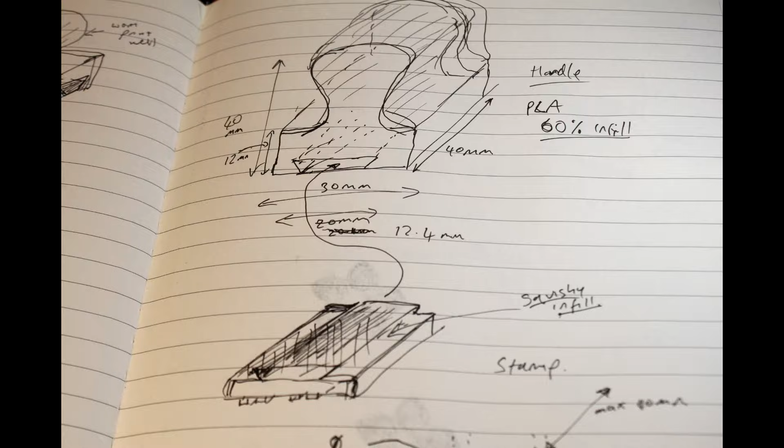So the first thing I wanted to do this time around was design a system to hold the stamps so that you could have multiple stamps on one handle and switch between them. So I needed to print a decent heavy high infill handle. I did this in Fusion 360. It's actually surprisingly hard to get the right clearance because you are mixing TPU and PLA and they both expand differently when you print them, but I did get there in the end after multiple attempts and quite some tweaking of the spacing between the two parts.

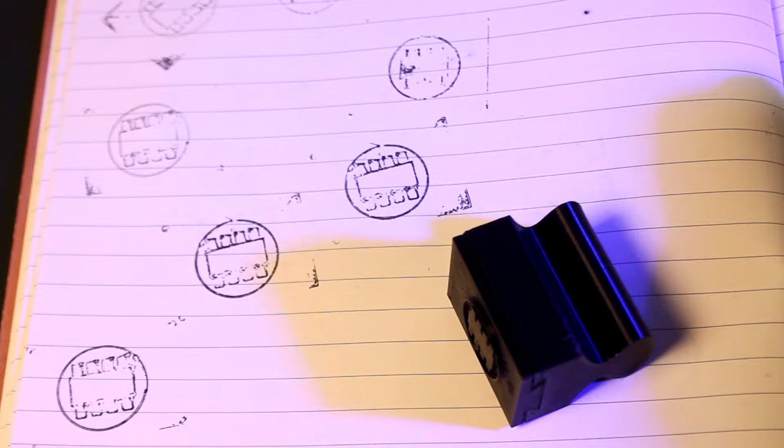Take 1 wasn't terribly successful. I tried simplifying the logo and printing in PLA. This honestly wasn't a massively serious attempt as I knew that TPU was probably going to be the better material anyway, but I didn't want to keep having to change filaments, so I decided to start with PLA while doing the handle, and then I could get both the sizing and tolerances mostly sorted out at the same time as I could rule out PLA as a stamp material, which I think I pretty much did. PLA is pretty poor at this. I assume it's just due to the lack of flexibility.

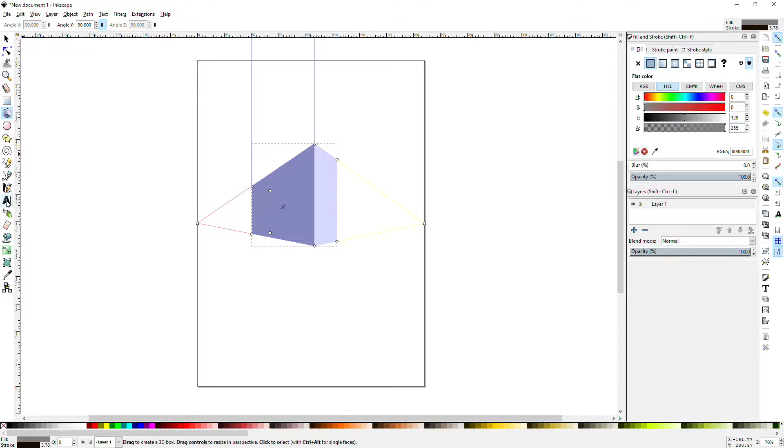This is of course pointing towards TPU, but not just that, the design of the stamp's base also factors in. More on that in a minute. But while we're digressing, if you want to make a stamp logo, I might as well tell you how I did it. I started out in Inkscape and I drew a design. What's important to remember in Inkscape is that any design work you do based on stroke thickness will not transfer to Fusion 360. Fusion 360 sees any stroke as just a line with no depth, so don't waste your time messing around with stroke width, colour, style, etc.

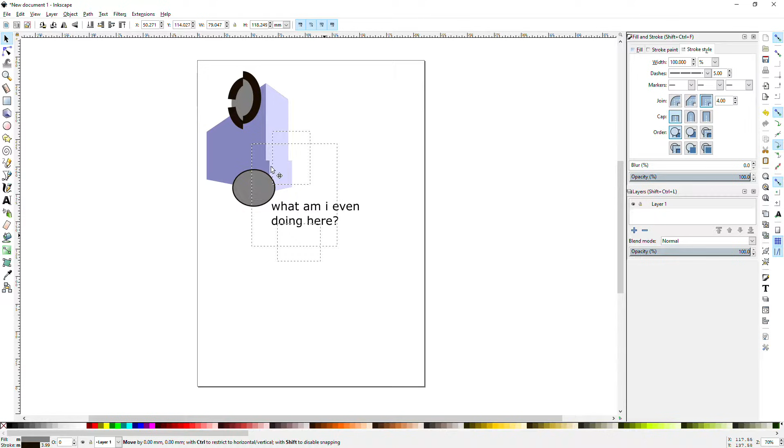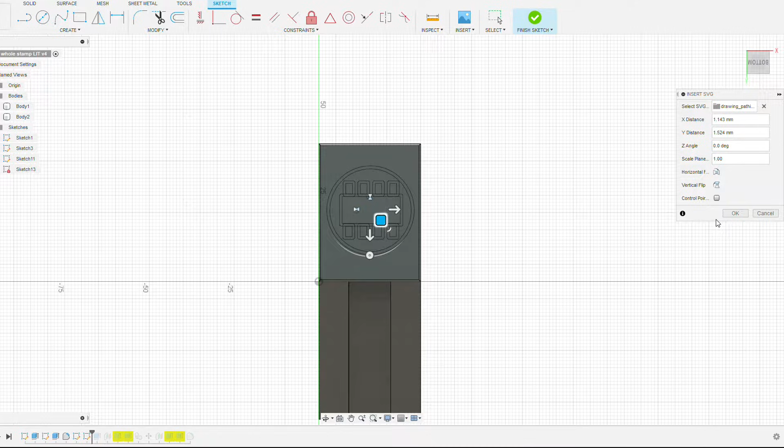Now before you save this, move the whole thing up to the top left corner, because that's what Fusion sees as its 0 point. It makes moving the design around in Fusion a lot easier. And then just save it as an SVG. Once in Fusion, you can simply import the SVG, and I recommend doing this as late as you can in the design, because either I'm stupid, which is quite likely, or you really can't easily move or edit SVG imports after you've placed them, which I found really annoying.

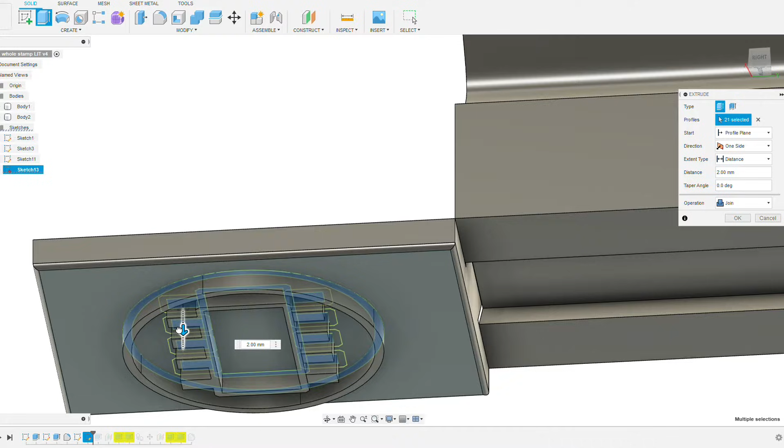Once done, looking from below, you just extrude the design out forward, so that would be a negative extrusion, and the base goes backwards, a positive extrusion. The reason you pull the design down below the plane instead of up is because then it will be reversed. So you don't have to reverse it on import, but if you did want to do that, you can also do that during the import process.

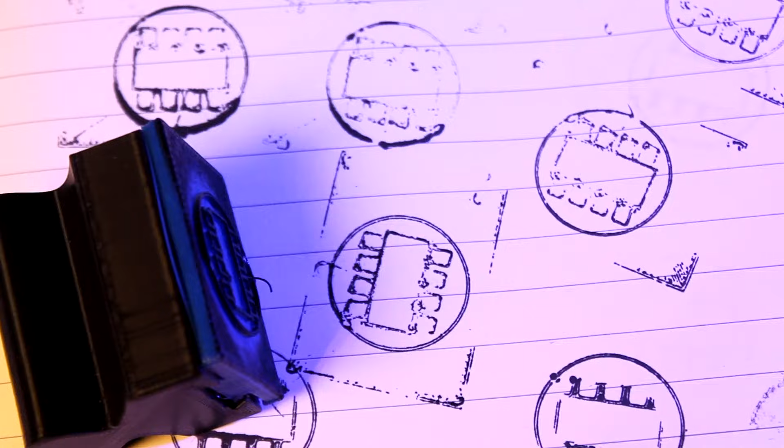The next tests were done with TPU, and they used a more outline-based design with no thicker areas, and these came out better on the whole. I would guess that when you print thin areas of TPU, then it allows a bit of flexing, which means you can get a good coverage. I noticed still though that the legs on the chip here, some bits would miss out quite often, presumably because they were too low to contact, even with that flexibility. We are making progress though. If we do a side-by-side comparison, you can see that this is better.

I experimented a little with printing at different depths of TPU, and I couldn't really find a sweet spot where it allowed enough squish without the edges of the stamp touching the paper. It was at this point that I decided to move on to the next test, which was to print the stamps upside down. This is a massive technical challenge for some designs, because not only do you have to get all the letters and fine details to stick down to the bed without moving, but you also have to support the base of the stamp somehow.

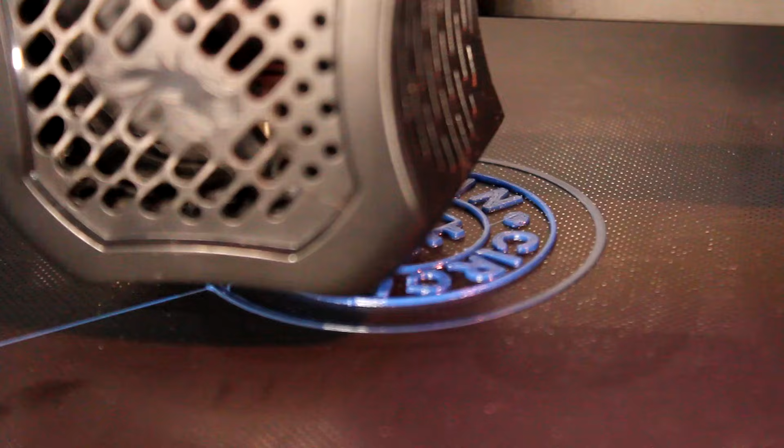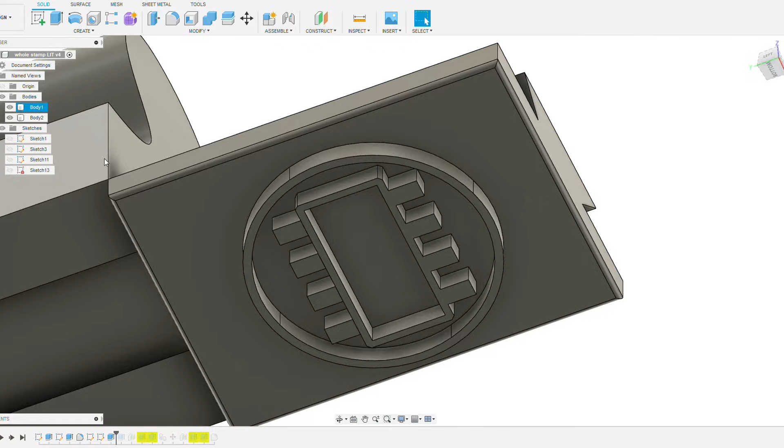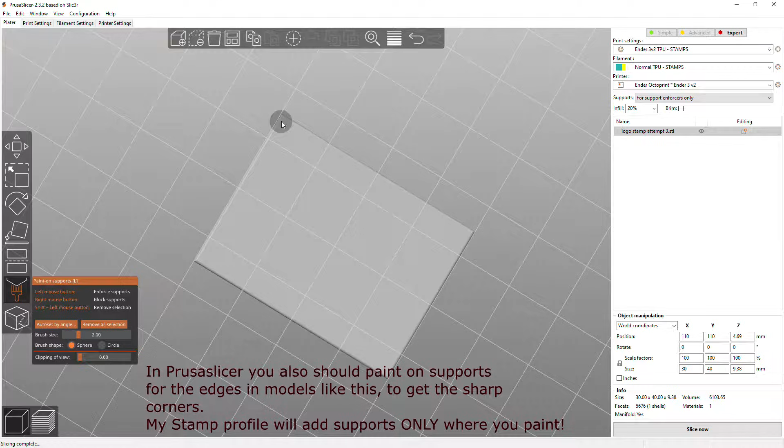On the second point just mentioned, supporting the base, it's actually not that hard. Because TPU is flexible and soft enough to cut easily with clippers, what I opted to do was to put some circles in the design, just small ones, and extrude them down along with the stamp image. And then once it's printed, you can clip them off. This works really well. I recommend keeping them fairly small because bigger ones are going to be harder to clip off. You essentially want to put them in unsupported corners and where there's large gaps to aid the bridging. Again, having your TPU settings dialed in will help keep this neat. It's actually quite amazing what you can achieve with TPU when everything is working right.

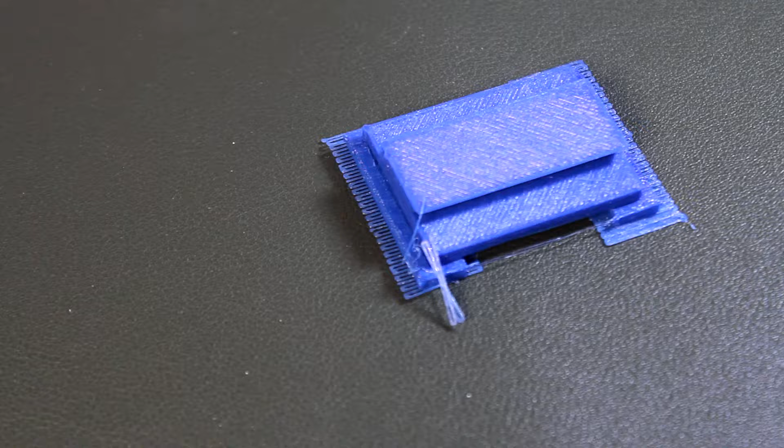So once this was done, I clipped off the support posts and I tried the stamp out. By the way, be sure to use eye protection when clipping off supports. They might be soft, but you still don't want them bouncing in your eye. Now this result is a lot better, but there's something still not quite right. And when I looked in PrusaSlicer's preview, I noticed the obvious mistake I'd made. There's a thing called elephant foot compensation, and this is to control horizontal expansion of the first layer. Without getting too technical, what it's doing is it's messing up the resolution and the thickness of the first layer as it's trying to make it smaller. So I don't want that to happen, it needs to be turned off.

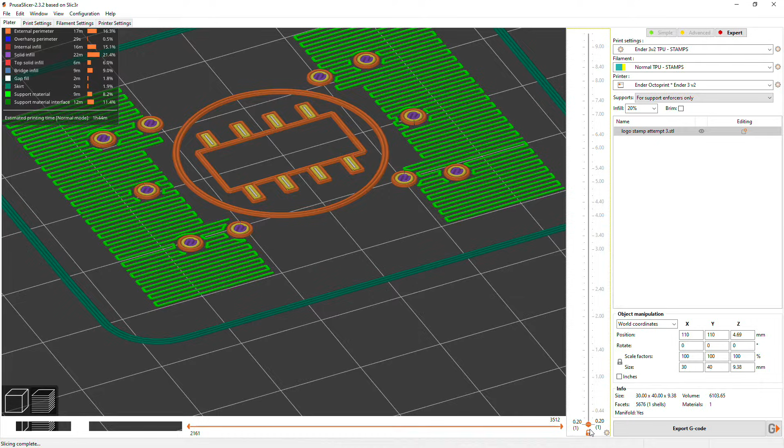This made a massive difference, and at this point I was getting really satisfying results, as you can see here. Compare this to the face up version.

Next I wanted to include text, so I did, and it soon became obvious that this stamp was lacking the necessary detail. There's really only two ways out of this. You can either scale up and make the whole stamp bigger, or you could try and increase the detail with higher print resolution. Now since we're printing flat on the plate, the only way to do the second option will be to change down to something like a 0.2mm nozzle.

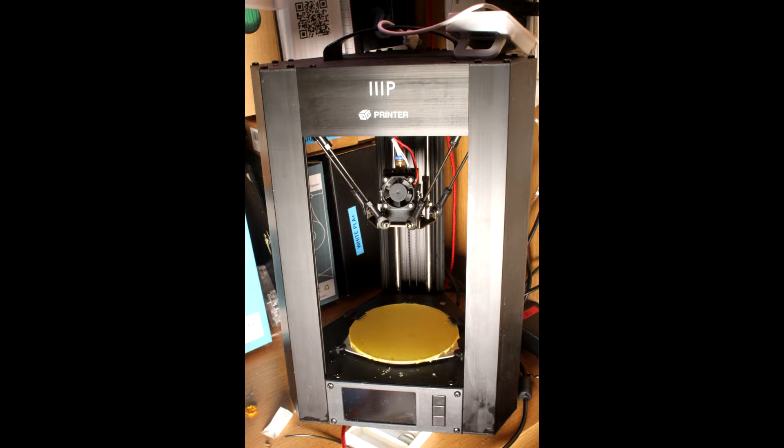And I did try a 0.2 nozzle with TPU, but I can report that this does not work well at all. TPU and small nozzles is an absolute nightmare. I now have a printer that needs repairing as it's completely bunged up with TPU. Not a big deal, I've left it for later though. The pressure against the nozzle just causes absolute havoc. So the only answer is to scale up, which is what I did next.

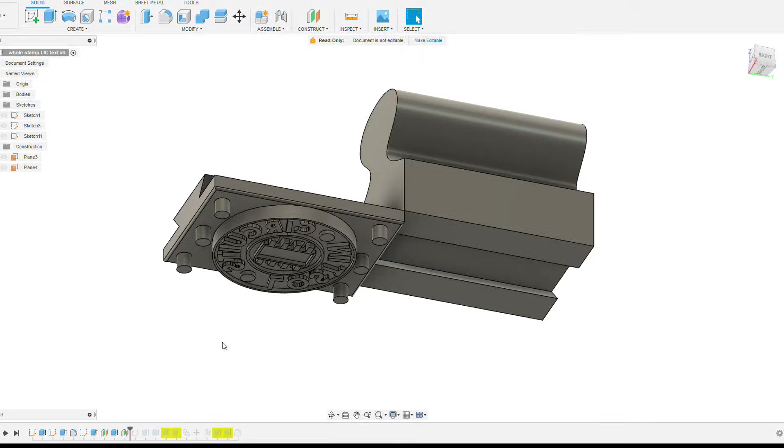This time I designed the stamp with the points I'd learned up to now in mind, so this is a point I want to stress, which I will also sum up later on, but it's important to design a stamp that will work well right from the beginning. If you already have a logo, it might not be suitable at all for a stamp, and you're going to struggle to get good results. Bold, simple lines work best without too much detail.

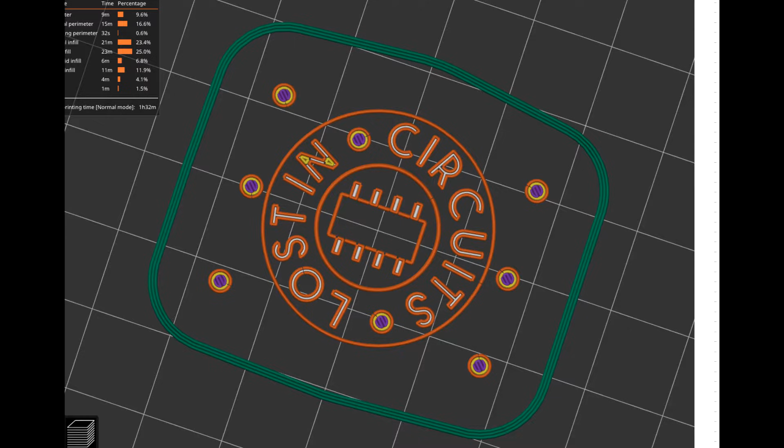I was very pleased with this. This turned out to be a perfectly usable stamp. You wouldn't even know this was 3D printed. At this point I also realised that to create a circular stamp, you could save a lot of effort by just using a circular base.

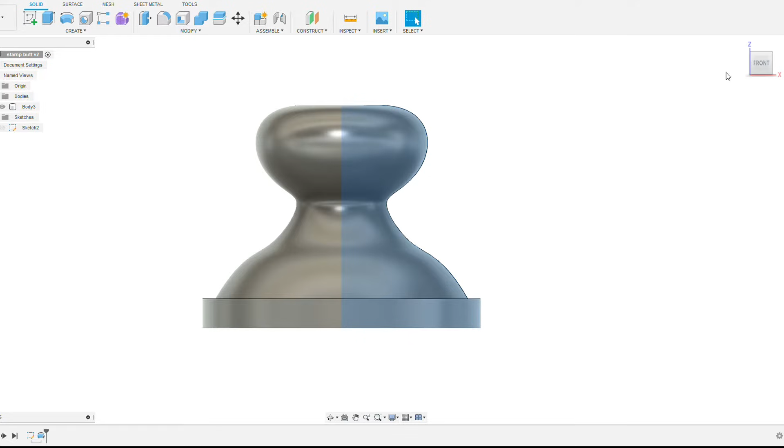So back in Fusion 360, I made a circular handle, and I went with an overall diameter of 48mm. A circular handle is easy enough to make, just draw half of the rough shape and then revolve it. I honestly don't know why I didn't do this to start with, it's so much easier. Once the stamp and the base were completed, I used standard superglue to stick them together. You need about 3 hours for this to dry, during which time it's absolutely necessary to clamp the stamp face down onto a flat surface.

Oddly, once this was glued and dry, I found that the circular stamp didn't work as well, and it took me a while to work out why, because there certainly wasn't anything wrong with the stamp handle or the adhesion or anything like that. And after some experimentation, I found out that it's actually to do with the squishiness not only of the letters, but the base behind the stamp. As I mentioned before, the whole stamp has to contact the paper to get a good impression, and the base is kind of a mattress behind the letters.

It was at this point that I started to mess about with different depths of printing and infills, and I realised that the best way is to use an infill that allows a vertical displacement, so a kind of compression, and this would be something like a gyroid infill. You can't infill the stamp detail, it's too thin, and I don't think that would be necessary anyway. You just need enough behind the stamp's design to allow the functional parts of the stamp to push back into it.

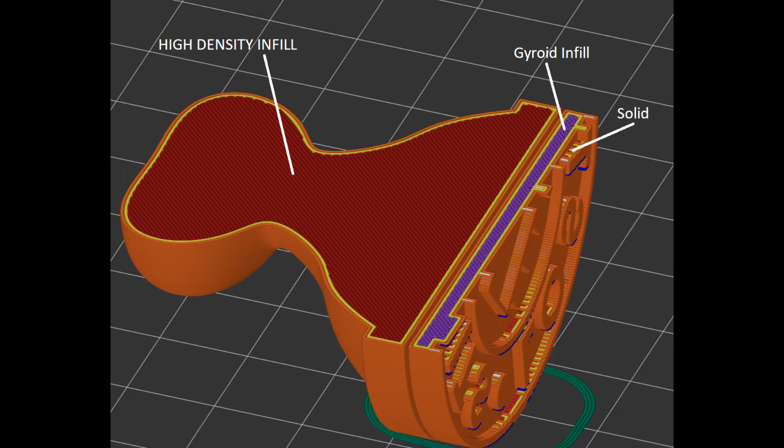As a side point, if your printer is struggling to print out some of the letters, as I found was the case with some of the thinner letters on this stamp, like the I kept ripping off after a couple of layers and then ruining the whole print, the answer to this is to either slow down a lot more, which is not a bad idea anyway with TPU, or you can do what I've done here, which is to add single layer supports on the first layer.

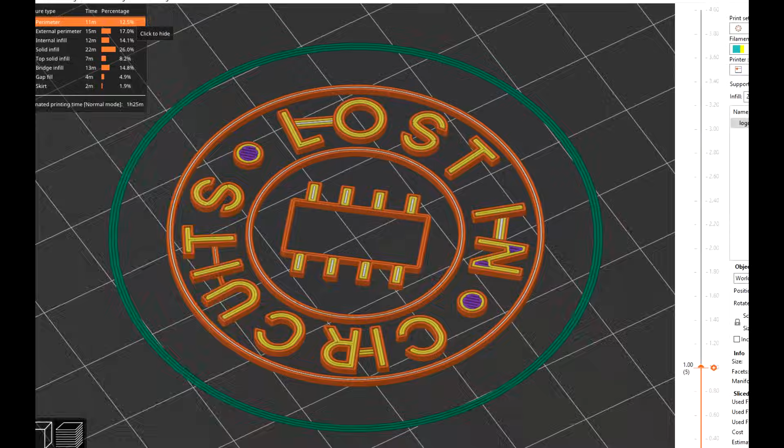Because they're just one layer tall, you can easily clip them off after the print, but you need to make sure to avoid putting them on curved parts of the design, because you don't want to have to cut off around a curved shape. So to do this, you would just need to extrude those parts to your print layer height, which is usually something like 0.2mm, that's what I use. So you extrude them to 0.2mm and then they will only take up one layer, and then you can clip them off afterwards.

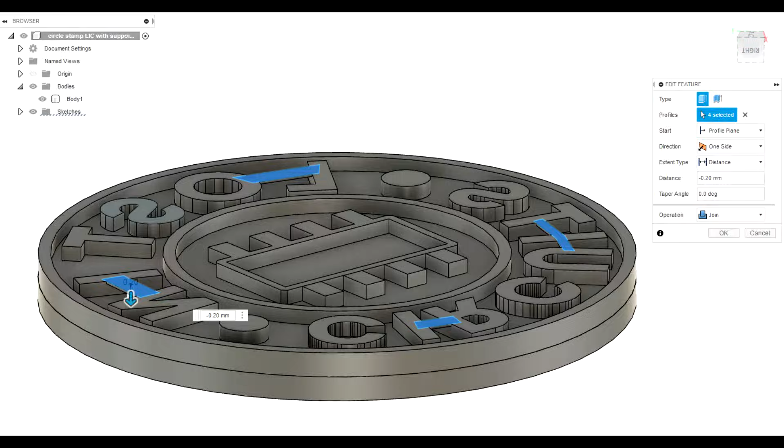Also, when I printed circular stamps without the outer rim here, and also when I had a thin outer rim, I found that what happened was they peeled up off the base mid-print. It would curl upwards at the edges, and then it would just come off entirely.

You could solve that by a design like this, which is kind of like a ring around the edge connected by a few single layer thick joining pieces. Again, these are easy to cut off afterwards, and this solved that problem entirely.

So as you can see, at this point I've basically sorted this method of making stamps. If I wasn't doing a video, I would just stop here and consider this a success. But there was one more method that I wanted to look at. After my previous video, one of the viewers suggested that I should sand down stamps after making them, and this would apply to the stamps that are made face up.

So I printed out the same stamp face up, and I took some 320 grit sandpaper to it. Now TPU doesn't appear to sand very well, as you might expect, it's sort of a bit squishy, but after maybe 10 minutes of just rubbing the stamp on the paper gently, I saw a huge improvement in the performance of the stamp. So the viewer was right, thank you very much for the advice.

Sanding stamps absolutely does work, and this result is almost as good as printing face down. If you had a design that you couldn't print face down, or a textured bed that isn't glass, then sanding is absolutely a good alternative method to use.

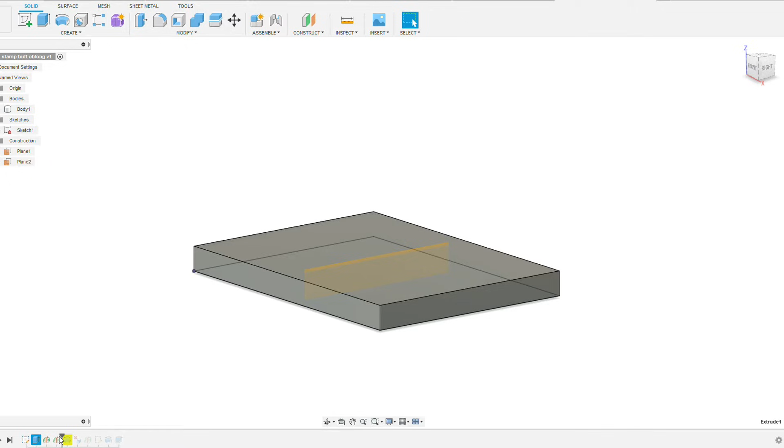So anyway, the last couple of stamps I made were rectangular, and these were largely done as props for this video and just extra examples so you could see that you can make them. Making a permanent rectangular base wasn't too hard. You just extrude a rectangle and then create an offset plane between the two shorter sides, and then draw the same kind of handle shape on it and revolve it to create a compound shape.

Try to spread as much of the handle's load onto the base as possible so that you don't have a weak handle and also you get good equal pressure when you're stamping, but that is all there is to it. Finally, I pushed the boat out with the stamp you saw in the intro. Nothing too tricky in terms of design, it's mostly text, but I want to mention that this stamp printed out perfectly first time as well, so I definitely do recommend trying my profiles out.